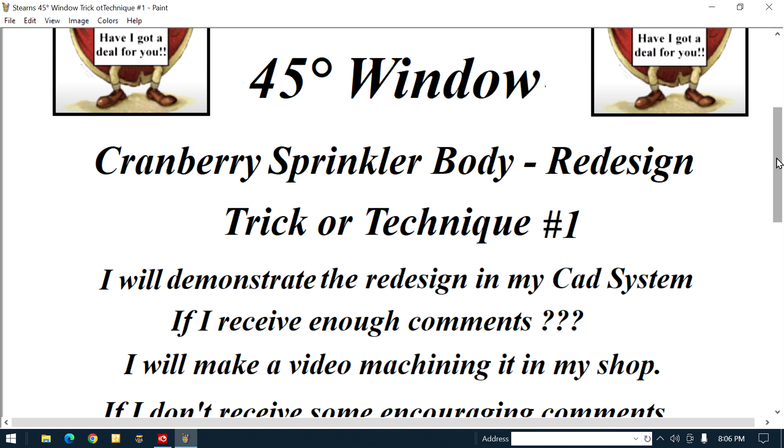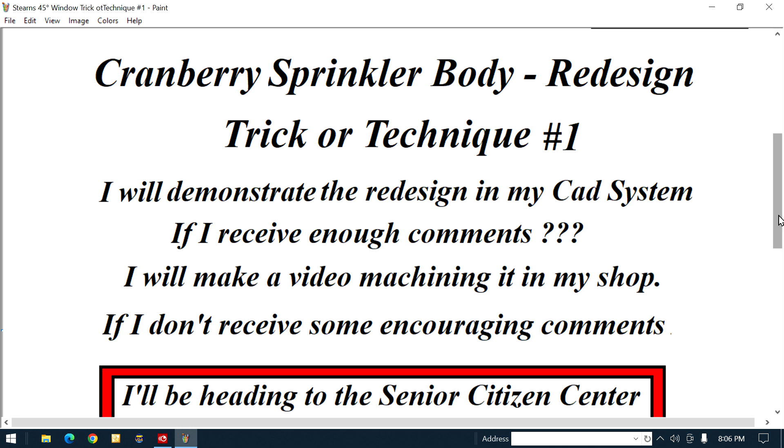All right, now let me go further. See, it says here, I will demonstrate the redesign in my CAD system. That's right now, right? If I receive enough comments or encouragement, I'll make a video machining it in my shop, showing my technique. It's different, it's cute, right?

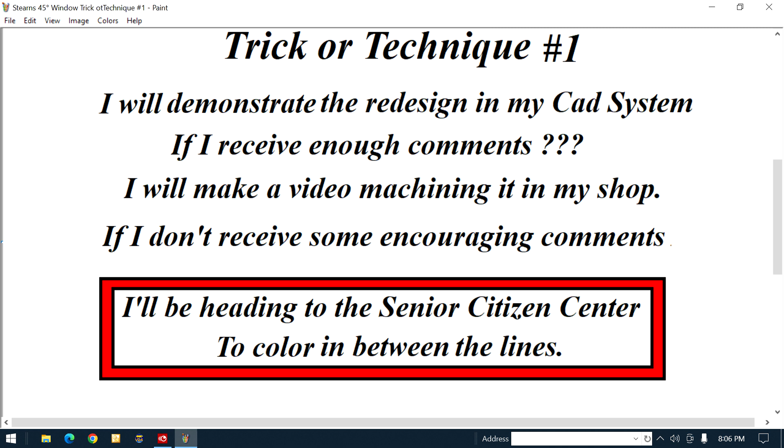Hang on. All right, you're in my CAD system. Okay, guys, I'm going to try to explain what this video is about. First, we'll start out with the name. The name is Sprinkler 45-degree window. What's that mean? I'll explain it as I go.

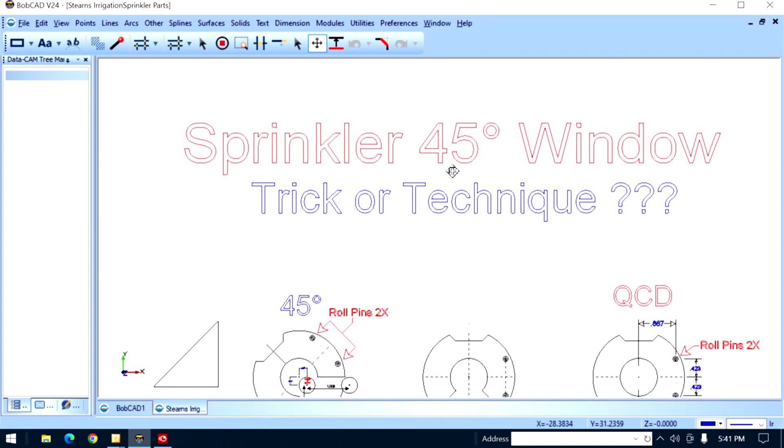In the terminology, if some YouTuber develops a different way of doing something, they tend to call it a trick. Where I come from, I don't use the word trick. The word trick is for magicians or for hookers. When I do something a little different from the normal, I like to call it technique, a different technique. Okay? So I'm going to explain my new technique or my different technique.

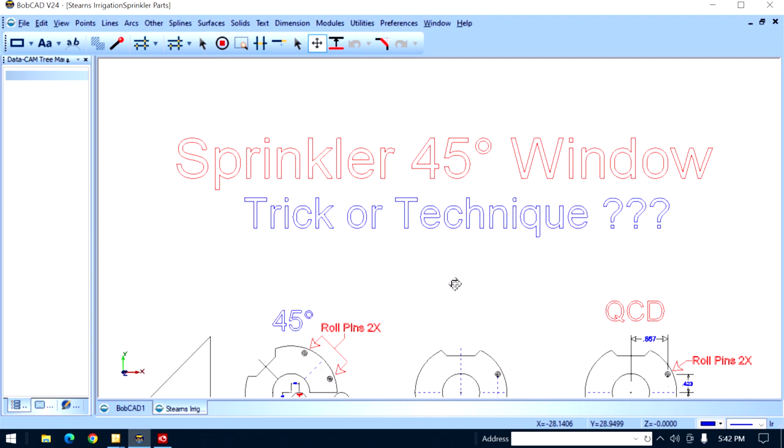You're in my CAD drawing. I'm going to go over the views, try to prep you, and then when this whole thing's done, I'll go out in the shop and actually do what I showed you in my CAD drawing. Let's start here. All right, I'm going to start right here. See this view?

First of all, I live in Massachusetts on Cape Cod, right? Along the Cape, we have a lot of cranberry growers, right? When you grow cranberries, you have to irrigate your bogs or put water on them, right? They've been doing this for years. They're goddamn good at it. They gave me the responsibility of redesigning this thing here called a sprinkler body. That's what you're looking at, see? Sprinkler body, that's the arrow.

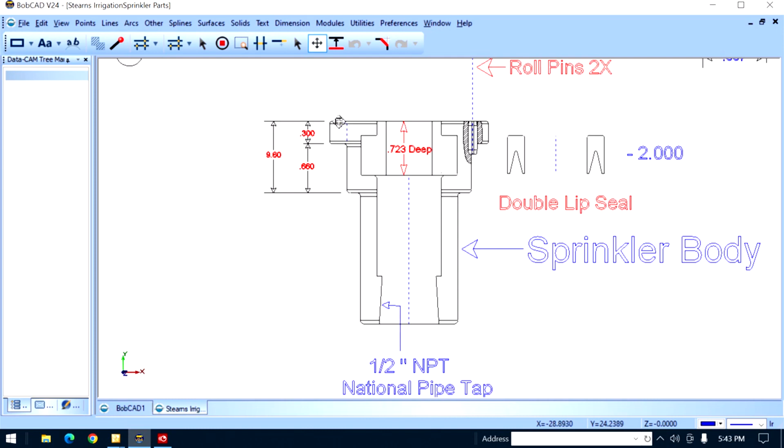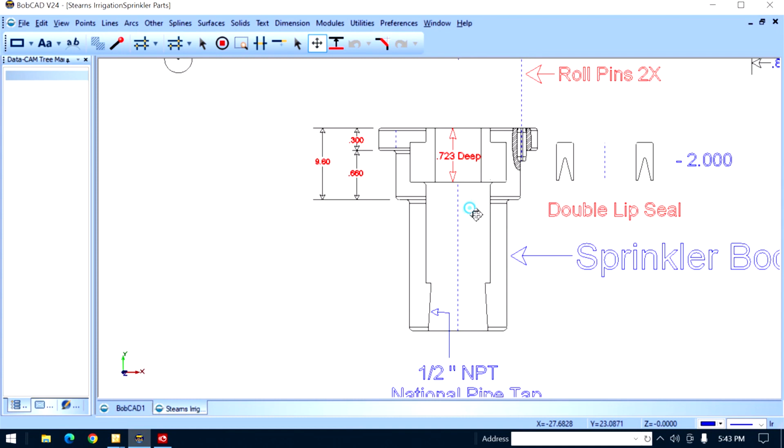This view here shows this is all diameter. You can see the outside diameters and the inside diameter. All right? Just to make it easier to see instead of all them dotted lines, whatever. What I'm going to do now is, let me do this. I'll project this so you understand the drawing. Hang on. See this ID here? I'm going to project it to this view.

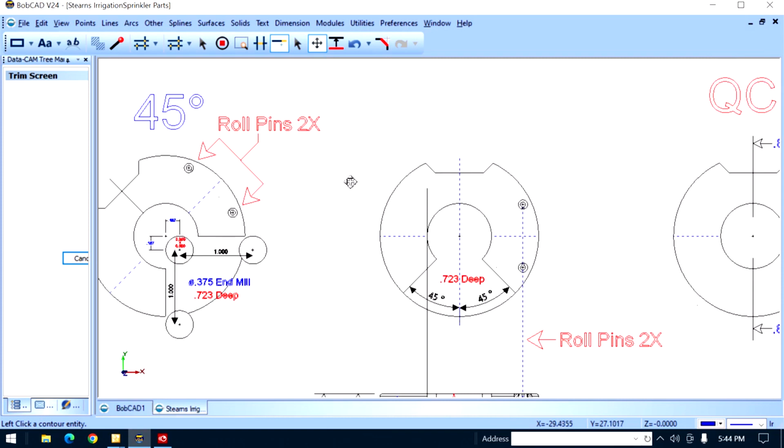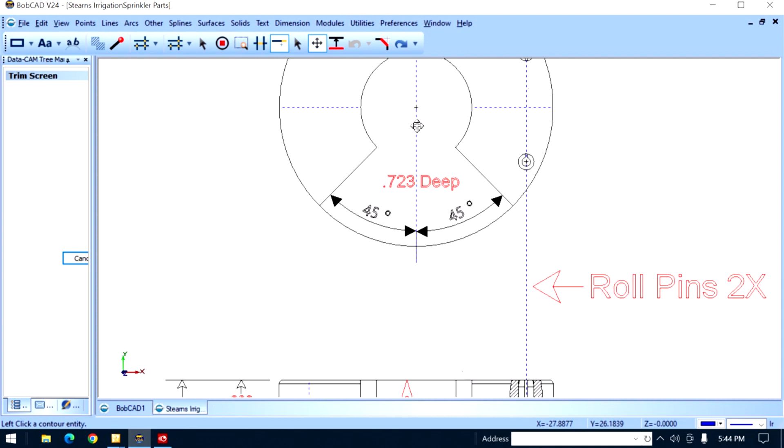You see? That's a diameter. And you can see it goes all the way down. Let me get that out of the way. Alright. Now I'm going to show you this point. You see you got a 45-degree opening. Alright? 45 on each side of the center line. Right? I'm going to show you where this comes in right here. See right there, that point? I'm going to project it here.

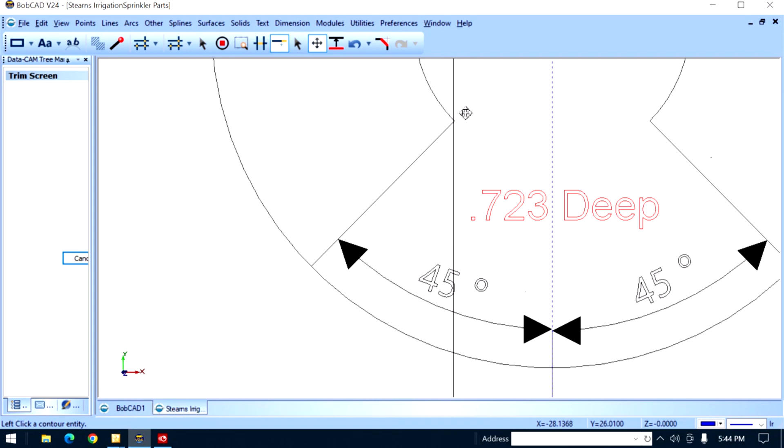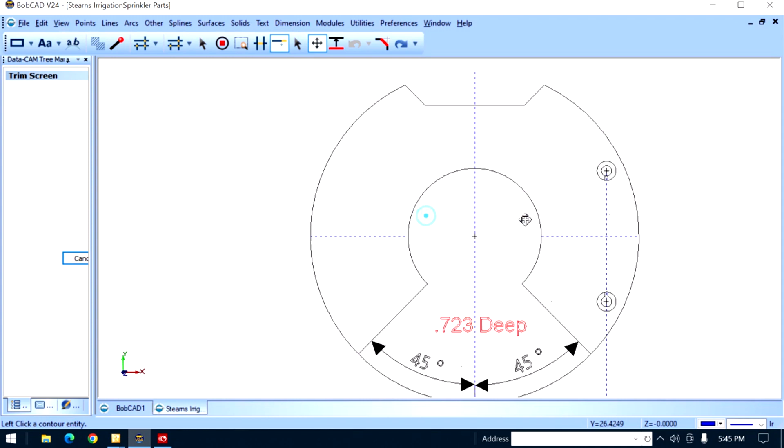You can see where that 45 ends. Starts and ends and all that shit. Same thing on the other side. It's symmetrical. Alright? What I'm showing here, see it says roll pins 2 times. There's a roll pin here and a roll pin there. We got to get oriented from this flat. See that flat where the mouse is? Right? So the geometry is relative to that flat.

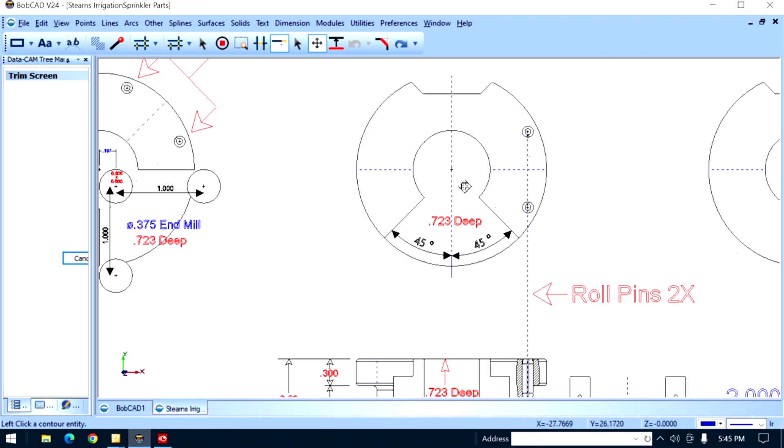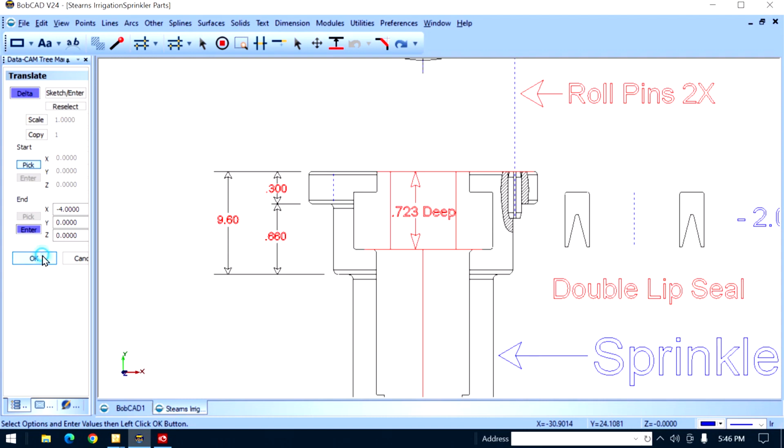Why did I do that? I don't want this angle to cut out these roll pins. So that's as symmetrical as I can get it. Alright? Let me do this now. I'm going to show you why I need that window. I'm going to move this area out of there so you can see it. Alright? Now you can see the outside and the inside.

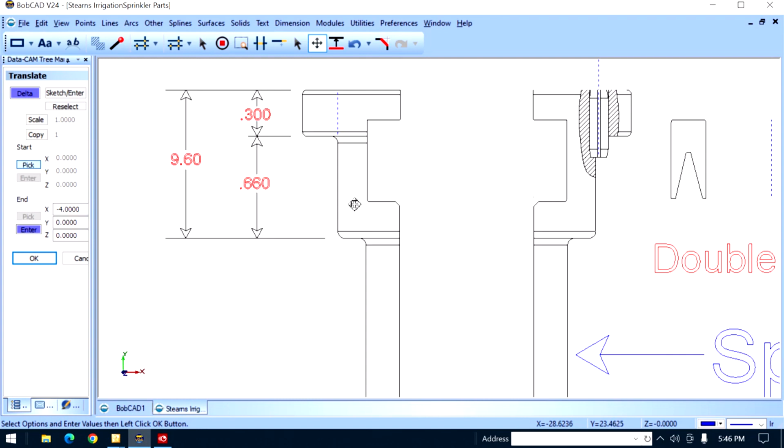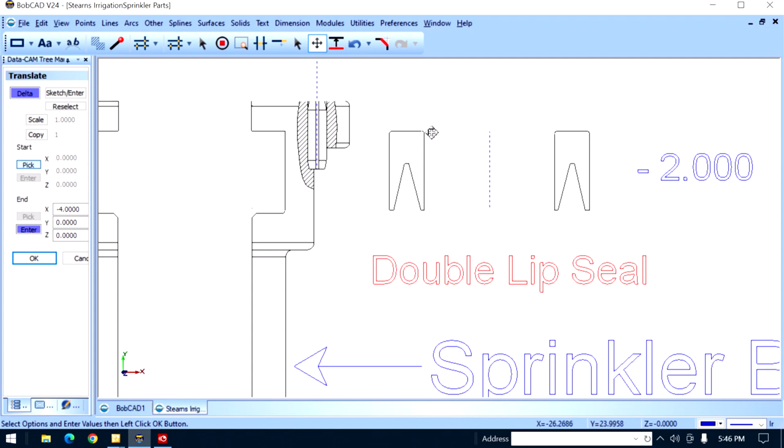See it? In here, in this area, this is crucial, right where the mouse is. That height, this diameter, and that height has to be smooth. Why is that? Because there's a double lip seal that goes up against that. Alright? Over here on the right, I'm showing the double lip seal. Usually it's flared out. I got it as it would be in assembly, straight on both sides. I'm going to put that double lip seal in there. Alright?

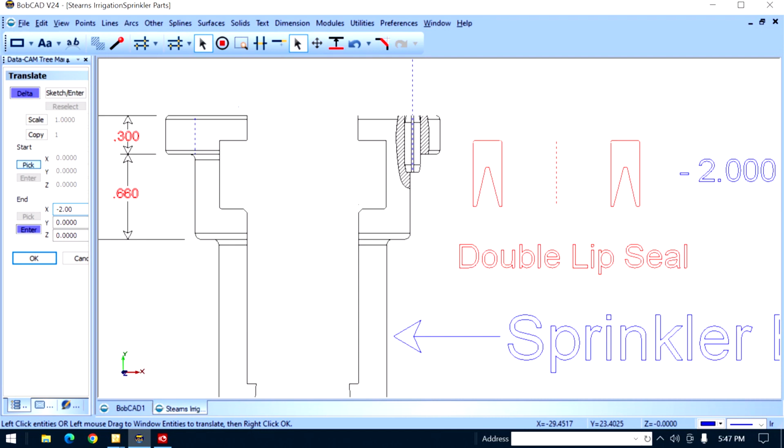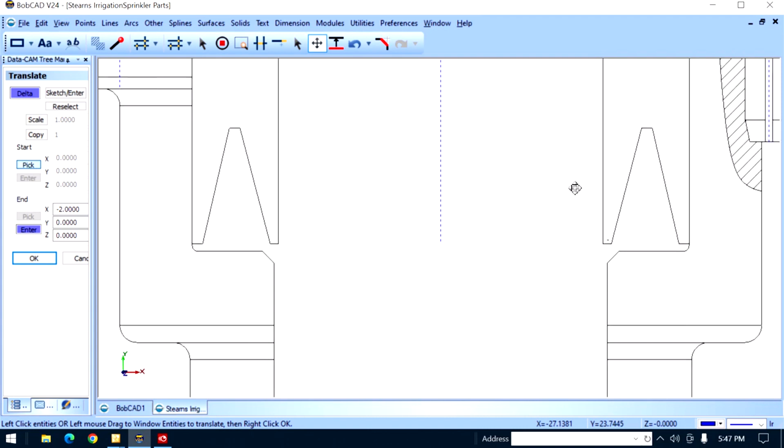So you can see the lip seal in there. See it? It's a double, it's a V lip seal. One lip here, one lip there. 2 lip seals. I'll show you how it works. Alright? Hang on. There's a pipe that goes in here because this disperses water. Let me put the pipe in.

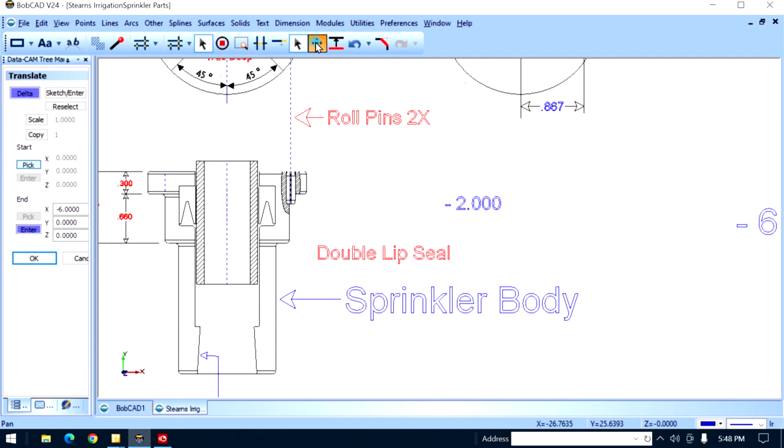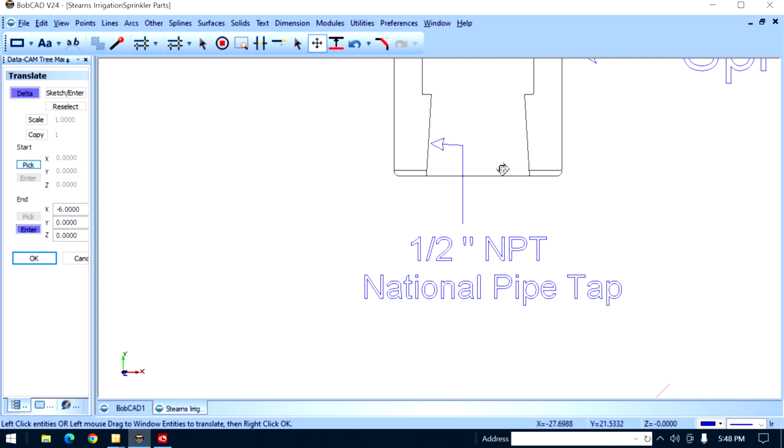Now you can see it in assembly. Here's the water pipe that feeds the irrigation. Here's the lip seal that stops the water from leaking. Alright? Down here, you got a national pipe tap. The water's piped in here, ends up in this area.

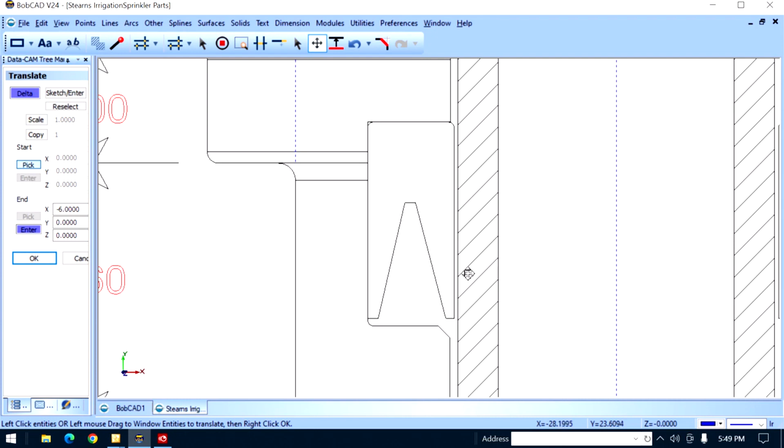You see it? Now, as the water tries to get out, there's a gap here. See where the mouse is? The water runs up the gap into that V. See that V? And then it pushes the lip this way. See it? And it also pushes the other lip that way. The water can't exit. It's got no choice but to go up the pipe. You understand? So, all right?

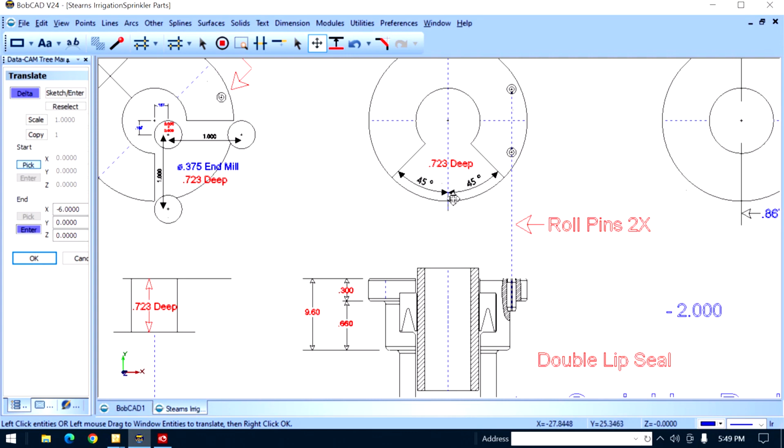The reason I'm opening the window or showing it, I'm going to take one of these, machine it out, and show the finish in there to show that the lip has got a nice surface to sit against. Hang on.

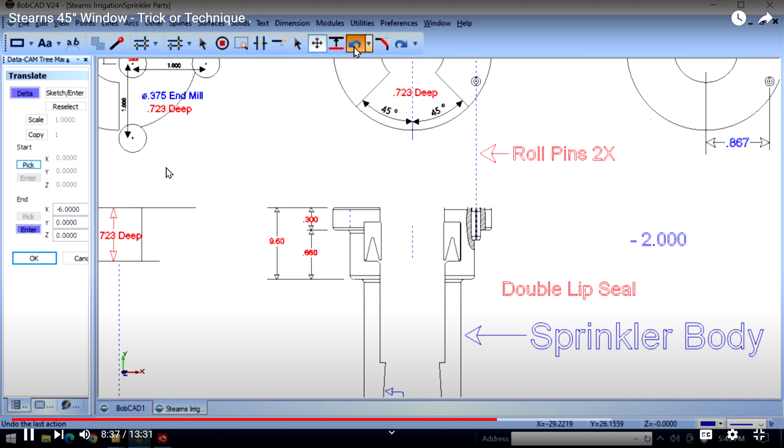Jesus Christ. All right.

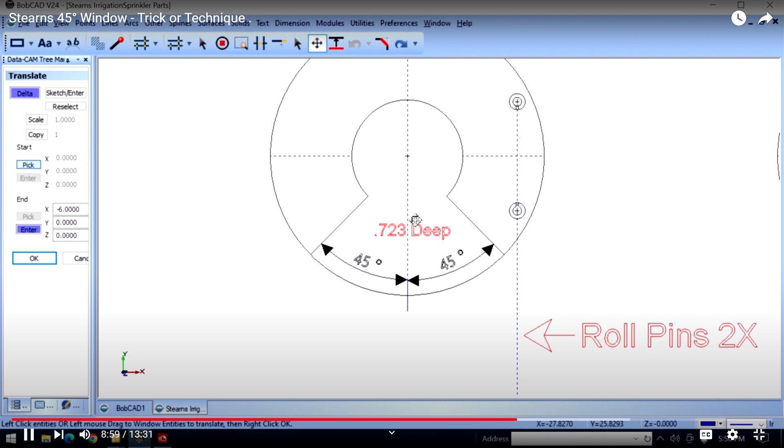So that shows how deep the window is. 723. See it here? So you gotta go like that. 723 thousandths deep. See it? All right, now, how would a typical guy do this? I can imagine. Well, they'd take maybe a center head or all these layout tools and start scribing lines here and there in the proper orientation to that flat.

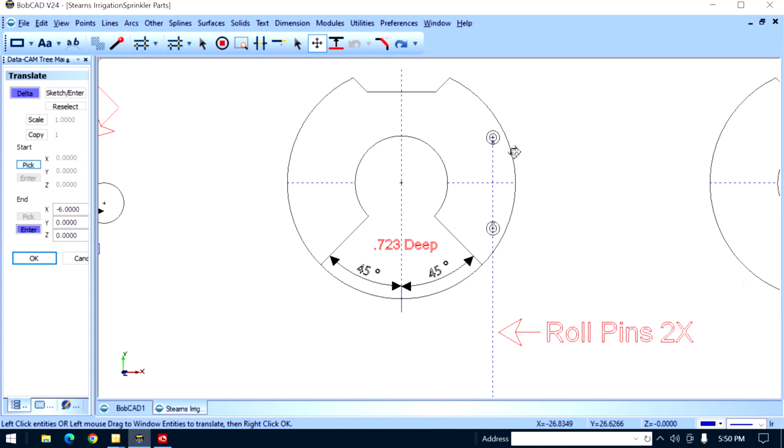Then they'd go and put it in a milling machine vise in a V block. You'd be looking down on it like this, and you gotta start spinning this thing so it's up 90, and there's a whole lot of maneuvering to do to get this exactly like that, right? And now your question is, okay, smart ass, what would you do?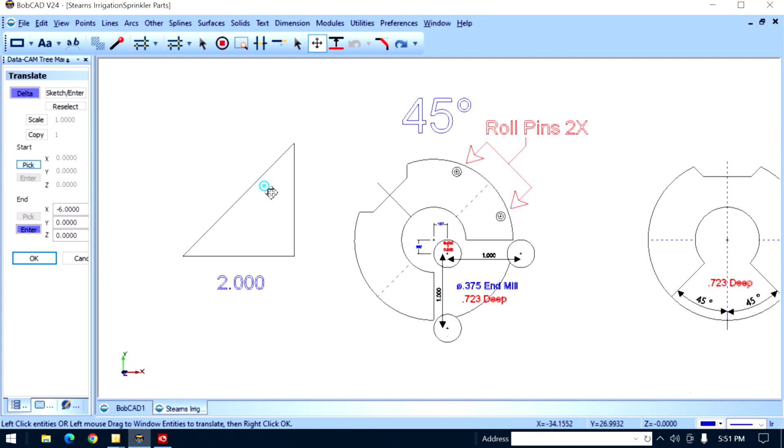Here's what I'm saying. I put this thing in the same vise. I'm looking down on the top of it here. All right? How would I get it at a 45-degree angle? Put it in the V block, just gently turn it, then I take this. See this thing here? That's a 45-degree block. They come, I got it in a set.

It's very small. I'm going to put this edge, see this edge? Against that edge. Clamp it, and I'll indicate this edge to make sure the orientation is right. I'll do that for you right now, okay? Hang on, baby.

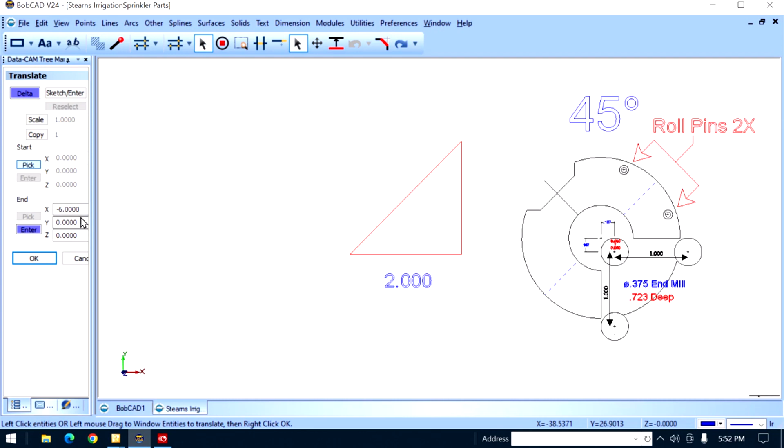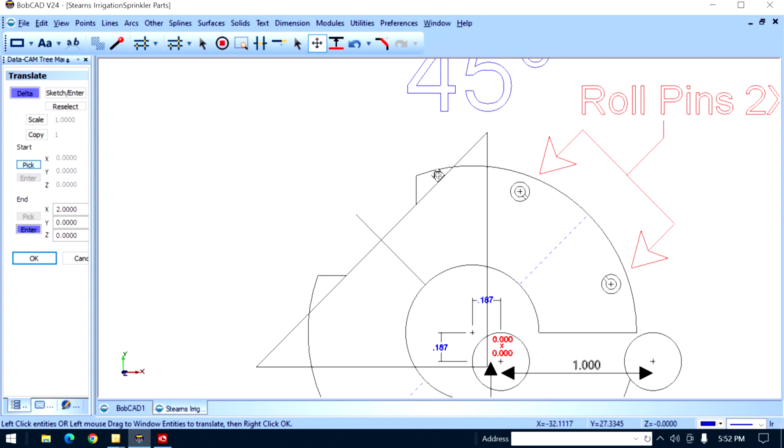Now you can see that this edge is right up against the flat that was there. Now I'll clamp it with some little parallel clamps right here and right here. And that'll be parallel to that. Then I'll run an indicator along here, right?

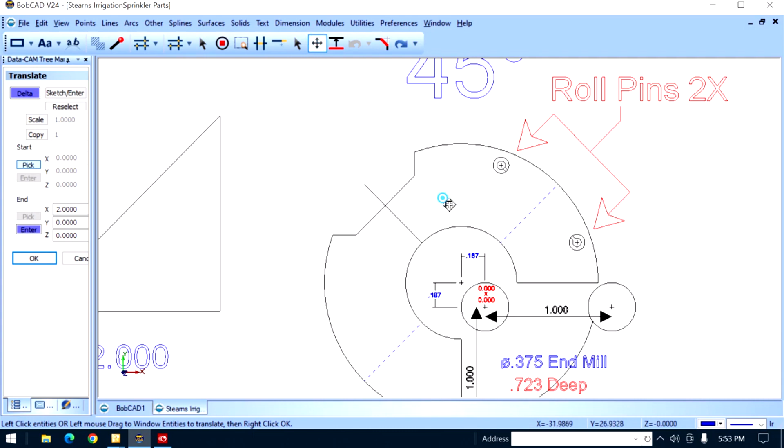This is not in the center, it doesn't have to be. What it's doing is orienting that flat at 45 degrees. I'd indicate that, all right? Then I clamp the vise, send it back. Now what do you do, pal? Here's where the DRO comes in.

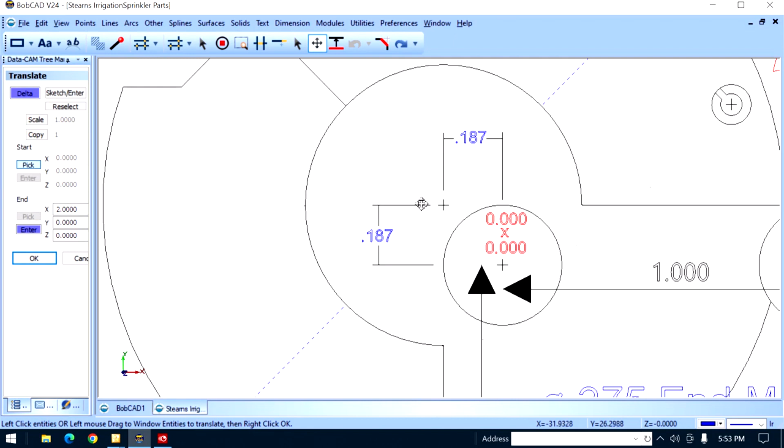Now I'd coax this hole. That's dead center. You can use an indicator, whatever you want. I use a coaxial indicator. Once I'm on dead center, with my DRO, I'd move over 0.187, all right, to get there. And with the same DRO, I'd go down 0.187. That would put me right here. You see it? Right there.

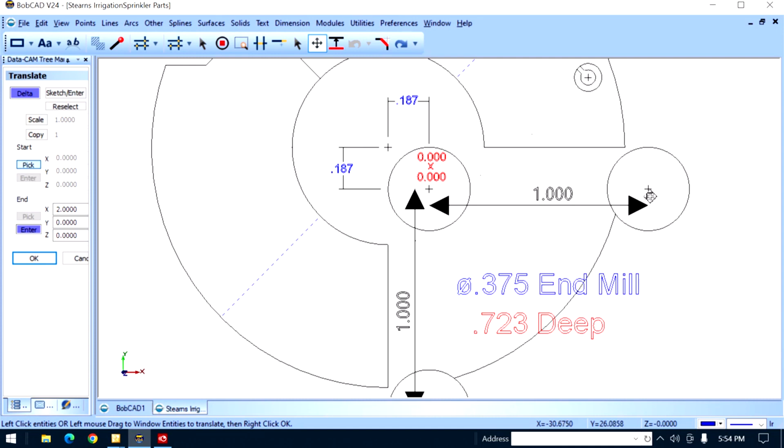Okay. Now I'm going to take, see it says 3/8 end mill. First I'm going to take a regrind end mill that's smaller than 3/8. Go to this location, pick away at it, go down a little less than 0.723. This way, 1 inch over on the DRO, same difference here. 1 inch down on the DRO. I'm still shy of this edge by a little bit.

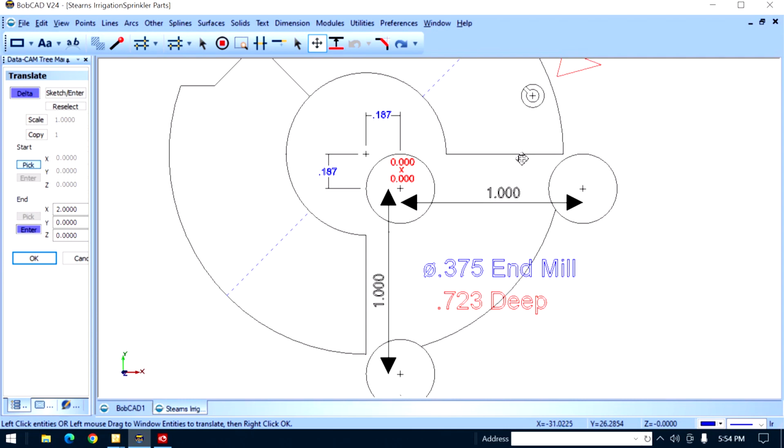Now I put in a brand new 0.375 diameter end mill. Go to the same locations and trim this edge here. Right along there, right along there. Alright? Then I'd be perfect. You understand? That's all I got. Let me see if that makes any sense to you. Alright? I'm out.